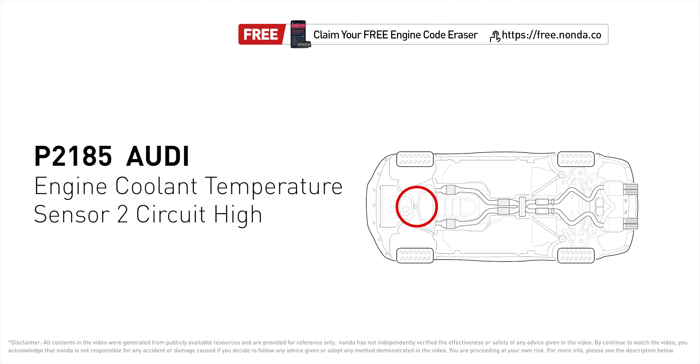Use the ZUS app to scan your vehicle and see the error code P2185. This code is set when the PCM detects an abnormally high voltage either in the affected sensor itself or in the affected sensor's control circuits. Here are 3 of the most practical solutions to fix Audi's P2185 error code.

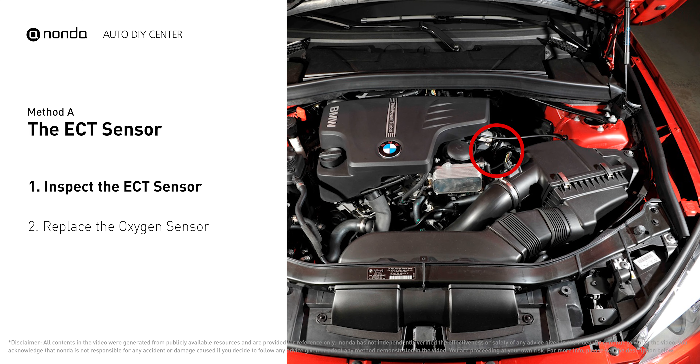Method A, the ECT sensor. In most cars, the primary ECT sensor is installed near the thermostat in the cylinder head. Remove the ECT sensor from the engine. Use a multimeter to proceed with a test on the ECT sensor. At the ambient temperature of 68 degrees Fahrenheit, the sensor resistance is between 2000 ohms to 3000 ohms.

If you do not get a reading, this indicates that the ECT sensor is faulty and needs to be replaced. However, if the ECT sensor has a correct reading, then we will proceed with Method B.

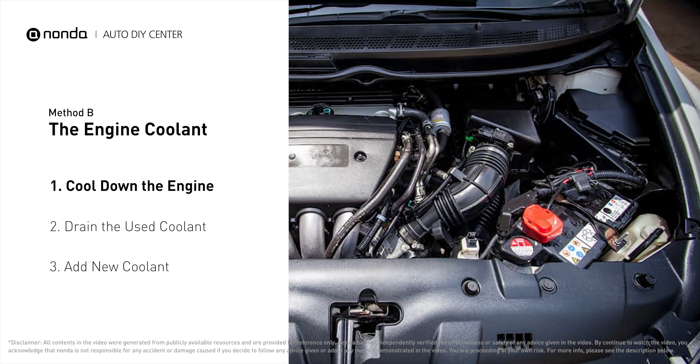Method B, the engine coolant. Engine coolant reservoir is often a translucent white bottle, and the radiator is the large panel at the front of the car. Cool down the engine and remove the radiator cap. Locate the radiator lower hose. Place a container underneath the hose. Remove the hose and allow the coolant to drain.

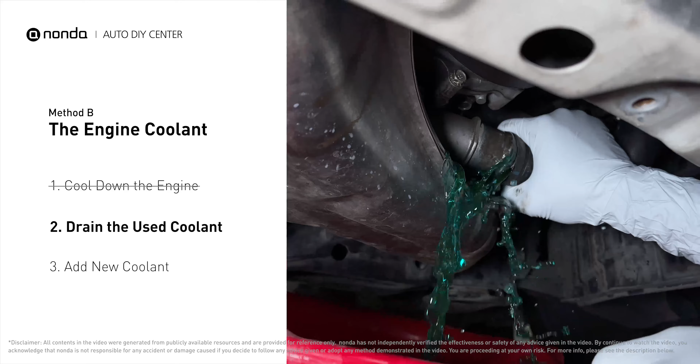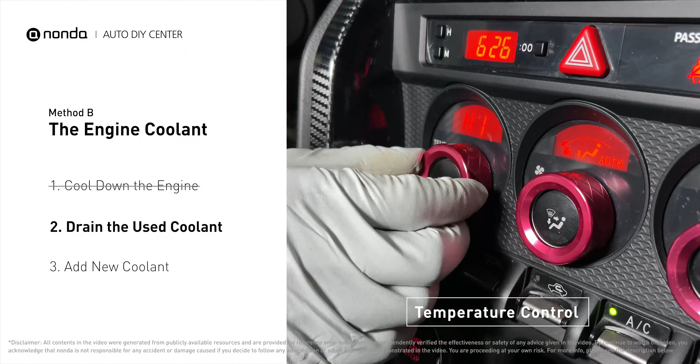To better drain out the used coolant, start the engine and turn the temperature control to maximum heat. Closely monitor the coolant temperature gauge on your dashboard to prevent engine overheating. Once the used coolant is drained out completely, turn off the engine and replace the hose.

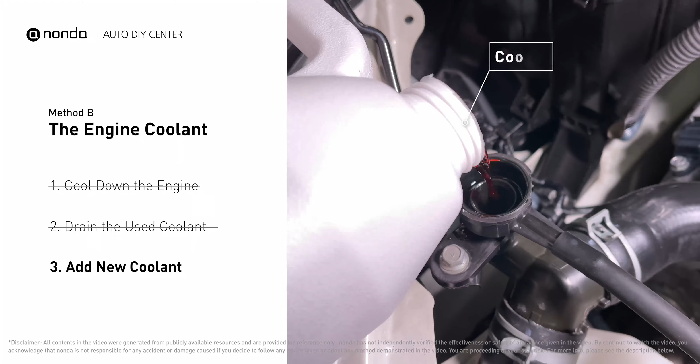Next, add fresh coolant to the radiator until it reaches the base of the filler neck. And then take off the cap of the coolant reservoir, fill it with fresh coolant, not exceeding the full line, then replace the cap.

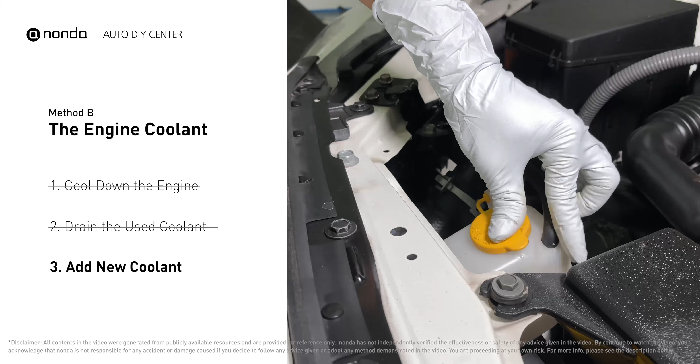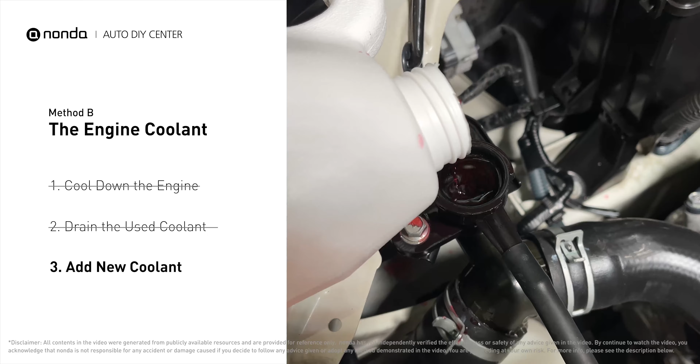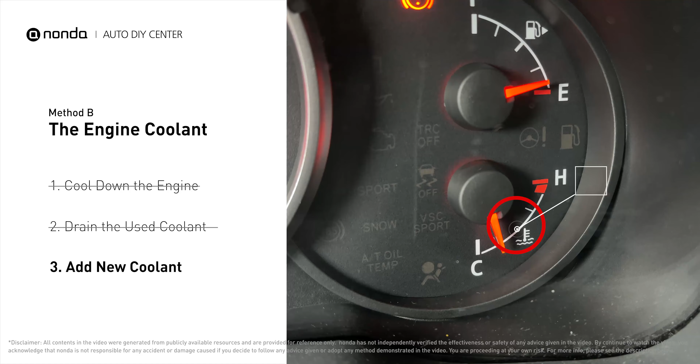After filling, start the engine, and let it idle for a few minutes to let the system purge all the air out, and then add coolant as needed. Replace the radiator cap. Closely monitor the coolant temperature gauge on your dashboard. Once the coolant temperature reaches 190 degrees Fahrenheit, turn off the engine. After the engine has completely cooled down, remove the radiator cap and add coolant to its full level.

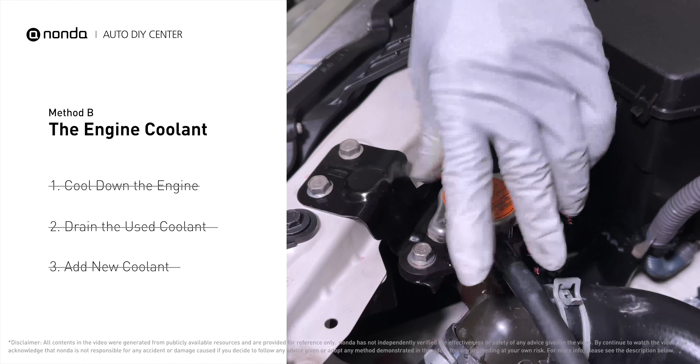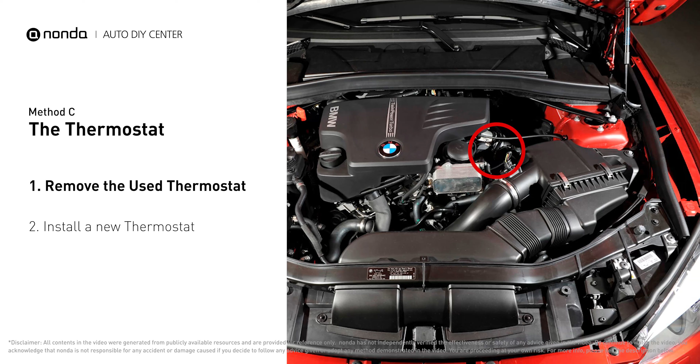Method C, the thermostat. In most cars, the thermostat is placed near the water pump on the cylinder head. First, carefully remove the thermostat from the engine. The engine has to be cool before attempting the process, and then install a new thermostat.

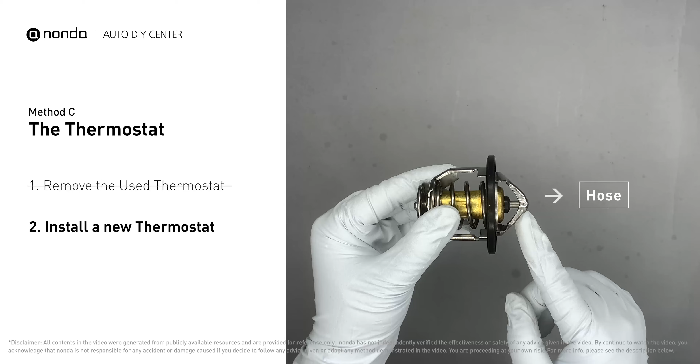To install it correctly, you need to make sure the short end goes toward the hose, and the deep end goes towards the engine. When you install it back to the engine, make sure the jiggle valve is pointed straight up to the top of the engine, so the air can get through the system.

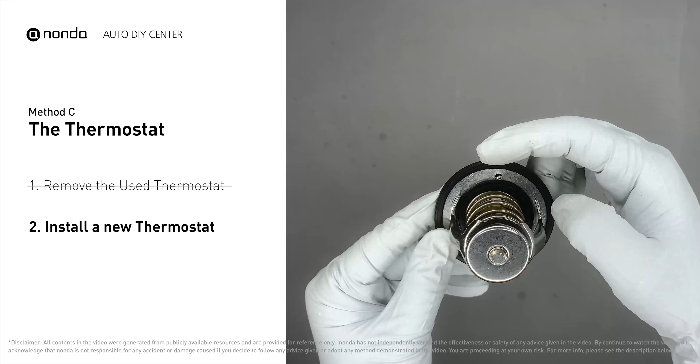So here are 3 of the most practical solutions to fix Audi's P2185 error code. After the repair, you can now use the ZUS app to clear the error code. And tap the rescan button one more time to make sure everything is fine with your vehicle.